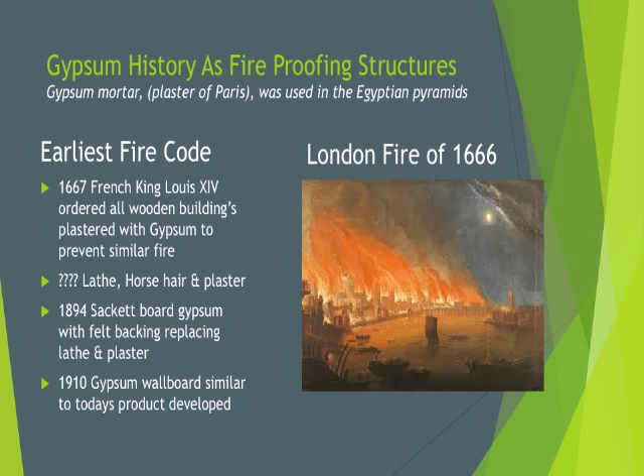Sometime later, gypsum then was used to finish the inside of structures using lath, horsehair, and plaster, and I haven't been able to find reliable dates on when that came about. But in the late 1800s, Sackett board was developed, and that was used similar to the drywall, as we call it, or sheetrock gypsum wallboard that we're using today, except that it had felt backing. About 1910 in the United States, gypsum wallboard, pretty much as we know it today, was developed and has gained in popularity ever since that time.

I'd like to talk about one of the key aspects of gypsum, and that is that gypsum powder is the only natural substance that can be restored to its original rock-like state by simply adding water alone, nothing else, and then formed back into shape and harden. And this can be repeated endlessly. It doesn't lose any of its characteristics no matter how many times we've changed its status.

And then just incidentally, we probably all used gypsum at some time today. At least if you used toothpaste today, you probably did. And I imagine it's 5 o'clock somewhere, so somebody may have had some beer, and good chance that they used some gypsum in it, along with vitamins and tofu. So it has many applications. Gypsum that's reclaimed from wallboard, we have not attempted to have FDA certified for use in food and don't plan to.

So how long have people been trying to recycle gypsum wallboard? Well, it's been about exactly 30 years. The granddaddy in this business is New West Gypsum. Started in Canada in 1985. I think they're still the leader, at least by volume, anywhere in the world. They have, I believe, 7 plants now, with several in Canada and a handful in Europe, as well as one in the United States in Washington State.

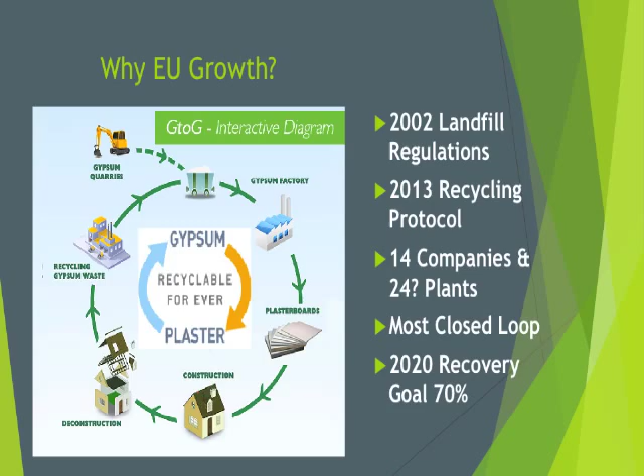So why is it important to recycle gypsum? I know that many of you that are tuned into this webinar are familiar with issues of managing landfills, but for those of you who are or possibly aren't, just a reminder or a recap. We've probably all heard about landfills that had serious H2S or hydrogen sulfide odors, some of them to the point where they were actually closed as a result. Hydrogen sulfide in the recovered gases or methane is a contaminant that at certain levels has to be removed before it can be used in place of natural gas.

The sulfate that dissolves out of the wallboard after it's been in landfill for some time also contaminates the leachate, and in some cases has to be treated differently. And then finally, if it's incinerated, of course, wallboard was created to be difficult to burn, but if it's burned in an incinerator, it tends to release sulfur dioxide gas.

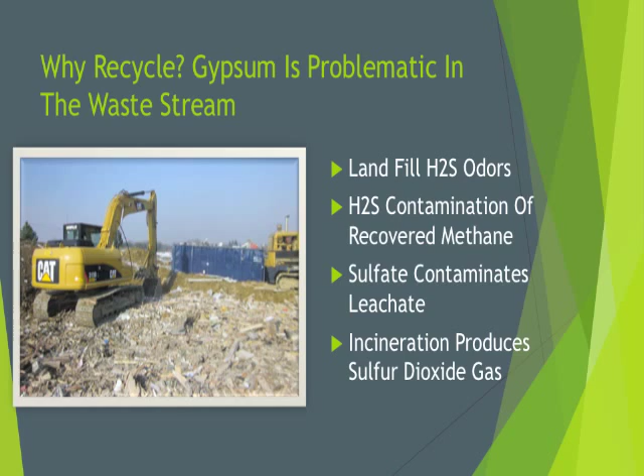So why do all these things happen? Basically because gypsum, when it's placed in an anaerobic state, in the presence of organic matter and moisture, will start to change the form of sulfur from a sulfate to a sulfide as a gas. And there are probably those of you who are listening that know much more about this than I do. But this problem is not new or uncommon. You can find plenty of research on it for well over 20 years.

So what part does gypsum play in having clean air and clean water? Well, the Clean Air Act requires SO2 reductions, and so as a result of that, many of the coal-fired power plants installed scrubbers in their stacks to remove the sulfur that was being generated from burning coal for power. And they did that by injecting liquid lime. The combination is a synthetic gypsum, which is chemically identical to mined gypsum.

This new source of gypsum completely flooded the markets from 2005 to 2012, to the point where in some areas gypsum was considered almost more of a waste than it was a product, and the prices actually dropped to 0. So that was tough for somebody trying to make it in the recycling gypsum business.

Then in addition, in the mid-2000s, the EPA started to take a look at all of these coal combustion residuals and the regulations regarding them, and they included things such as slag and fly ash and gypsum, or some people call it FGD if it's generated from a power plant. I think it was included almost just because it was part of the CCRs.

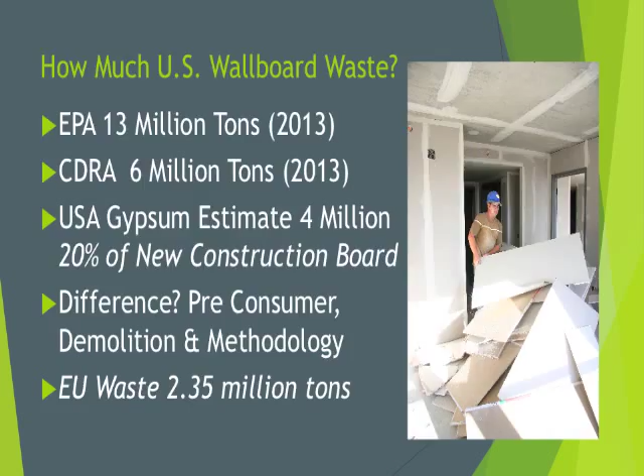So why is 20% wasted? For those of you who are familiar with construction, you may really know this, but it essentially comes down to the fact that gypsum wallboard is a fairly cheap commodity, and putting it in place involves a lot of labor, and the most expensive parts of installing gypsum wallboard is the finishing of the joints, the painting, and that sort of thing. So anytime there's a joint that has to be finished, there's a lot of costs in that, and anytime there's a joint problem, it involves a callback.

So if there is a window, a doorway, or any other kind of cut like that, typically they put the board and then cut out that window or door, and the piece that they've cut out is not saved for reuse. It's tossed. I think the 20% number is conservative. On jobs where we've done sort of separation and monitored, we've found rates that range from 15 all the way up to 40%. So I feel comfortable that my 20% number is probably on the conservative side.

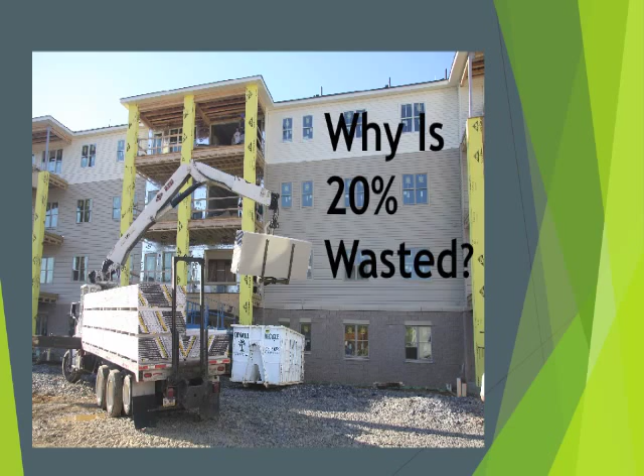So then we drill down farther and we say how much wallboard is actually recycled in the United States. The CDRA white paper, again, reported 300,000 tons, which would be 7% of shipments. And the recyclers that I'm familiar with, who are established and I'm going to say formal, are probably 10 across the country. And so it's being done at a very, very low level.

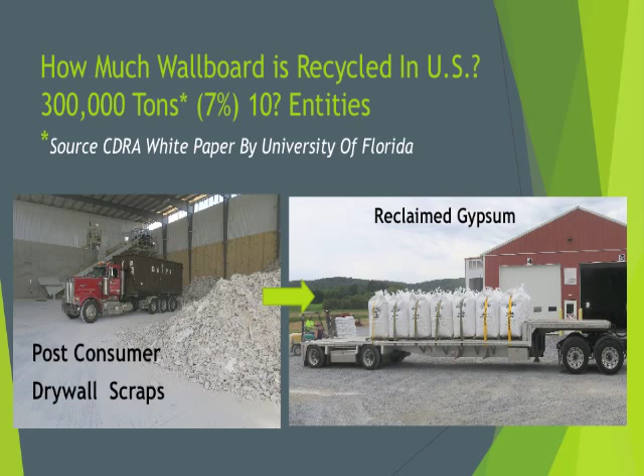So why only 7% for a product that everybody knows how to recycle and it's been done for 30 years? I think the number one thing is that the mentality in the construction industry has been just to throw everything in one container and send it somewhere, whether that could be to a single stream or to a landfill. It is generally not considered much by the crews that are at work handling these wastes on construction sites. We do know that if the wallboard is commingled with the other wastes and exposed to weather, we're going to have a reduced recovery rate, even if it does go to a single stream facility, and the quality of that recovered material will have deteriorated. So there's some single stream loss.

And then we go to urban volume versus logistics. And for those of you who are familiar with what I call curbside or recycling in Pennsylvania under Act 101, they're all the same issues: urban volume versus logistics. And then you have easy logistics in rural areas, but you don't have much volume and you have to travel long distances, and costs and all those kinds of things have an impact on that.

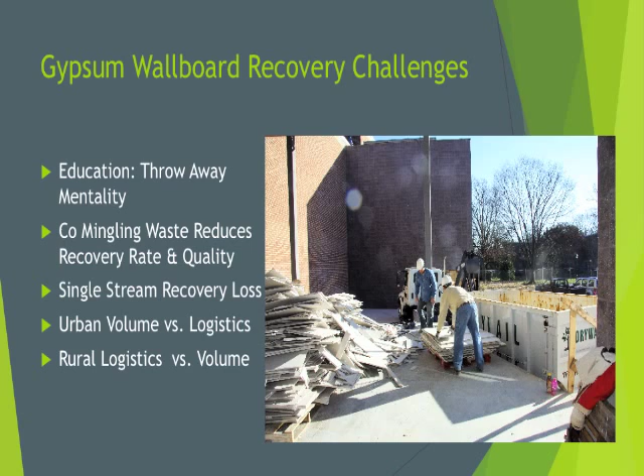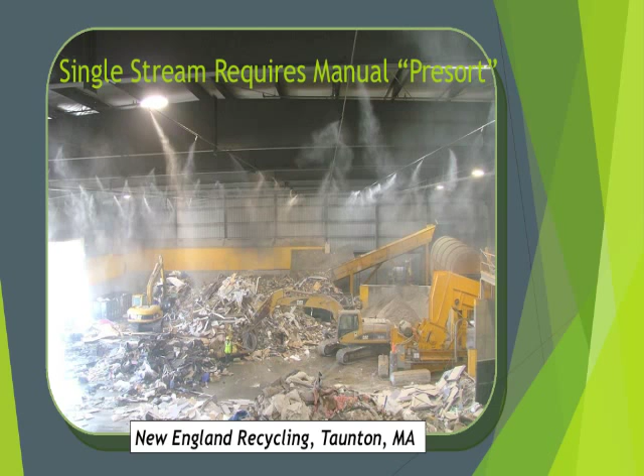So let's talk a little bit more about single stream recycling. I wish I had a better picture than the one I'm showing you, but hopefully you can see that a single stream facility involves lots of trash and lots of equipment. And that material is moved through specially designed equipment to handle C&D. These people that have invested millions of dollars in these facilities are doing a great job of recovering a significant amount of construction waste that otherwise would have found its way to the landfill. But wallboard provides them with a real challenge.

And we have to handle this manually as opposed to through the system. I'll try to shed some more light on that, but typically when those trucks arrive and the mixed construction wastes are dumped out on the floor, they'll use wheel loaders to push it on a pile. A grapple attached to some kind of machine is used to pick it up, put it onto a conveyor. In some recycling systems, there's even a pre-grind to reduce the size to where it's easier to pick.

And then almost every system crosses a screen next to let the dirt and fines fall through. If the wallboard is left in the mix, a great deal of the wallboard by this time is destroyed down to powder size and ends up being in those fines. In most systems, the fines that are screened out go to landfills as alternative daily cover, or ADC as we call it. And a typical well-run single stream construction waste handling system will produce from 20 to 30% of the volume that enters that system going out as fines.

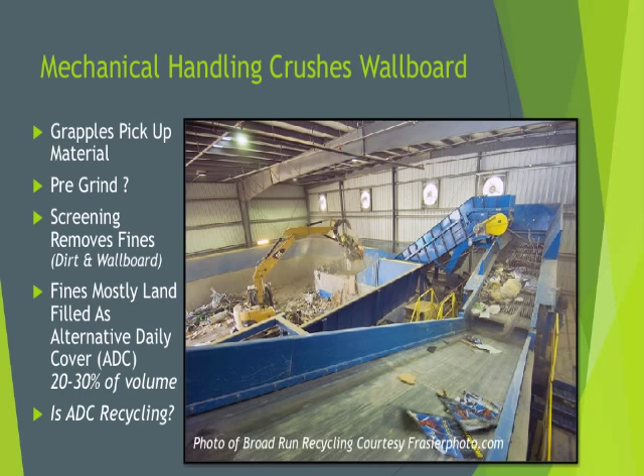The topic of a great deal of debate in the last couple of years has been whether or not shipping fines out as ADC is recycling or disposal, and we'll touch on that again in a future slide. So by the time that wallboard goes through all that mechanical handling and gets up to the typical sort line where the folks you see here are pulling off a variety of recyclables from that belt, there's typically almost no identifiable or recoverable pieces of drywall that can be picked off and sent out for recycling.

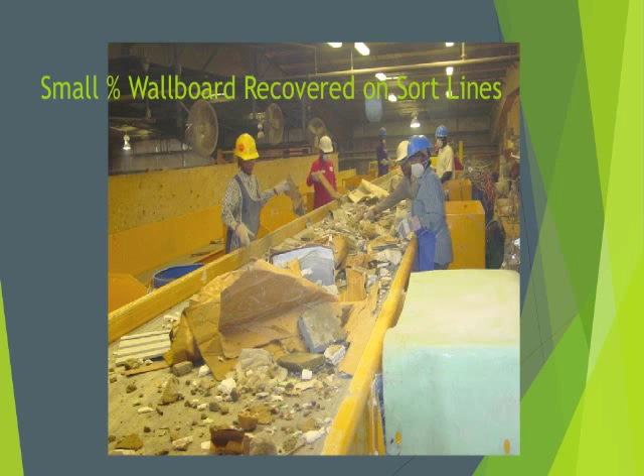So now we have a new version of LEED from the United States Green Building Council. LEED version 4, for those of you who are in tune with that, is coming into play. We still have some of the older versions where projects were filed under the old version working their way through the system, but all new applications have to go under version 4. And it encourages a great deal more transparency than the earlier versions, and maybe inadvertently also encourages source separation. Under version 4, you need to identify whether it's source separated or whether it's going as commingled to a recycling center, and also need to identify the end markets for those products.

So it presents a further challenge to something that's near and dear to my heart, which is something in the industry we've termed sham recycling. We have situations where people would bring everything in, run it through a grinder, cherry pick a few of the valuable items, send 50 or more % out by rail as alternative daily cover, and claim that they had recycling rates sometimes as high as 95%, with no auditing and no identification of markets. It just happened on a fairly wide scale.

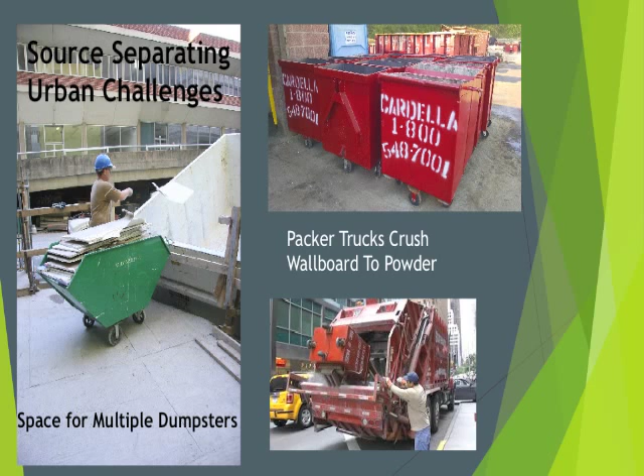C&D waste can be commingled and inserted into what are often called minis, the little red containers in the upper right, and then rolled down to a street or parking area, and a crusher packer truck picks it up. There's gypsum in that mixed waste. By the time the packer truck's done, it's really turned to powder that can't be in any way separated from the other waste.

Then we deal with things like staging space. If we're going to have a separate dumpster, and we can only have one there at a time, we've got to be able to stage a whole dumpster load of drywall or wallboard before we bring the wallboard dumpster. So it's got to be stacked somewhere. The gentleman on the left is dealing with one of those piles, and a cart on an elevator goes, taking it down a freight elevator and somehow getting it in that container.

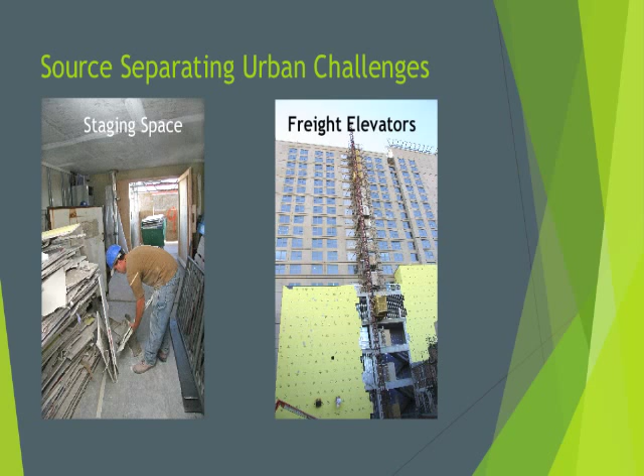So now to talk about a potential solution. New York City generates 300,000 tons per year, and that number comes from the building product ecosystems. For years, we've been working on attempting to get wallboard out of New York City. We've had some success. We have a few good partners there that have worked with us for a long time. There have been some policy efforts going back to 2003 that involved everything from zoning to some city efforts. There has also been some auditing of the recycling rates.

And after all this trial and error, I suppose you could say, we actually tried the One World Trade Center, and we got some loads out, but it was just very difficult, and everybody kind of lost interest in it. And I'd like to give a shout out to the Durst Organization, because they decided that they wanted to make this happen going forward. They have a group that's building product ecosystems, which looks at a lot of different facets of building, but within that, they formed the Wallboard Systems Work Group, which is a partnership between academia and industry and other stakeholders.

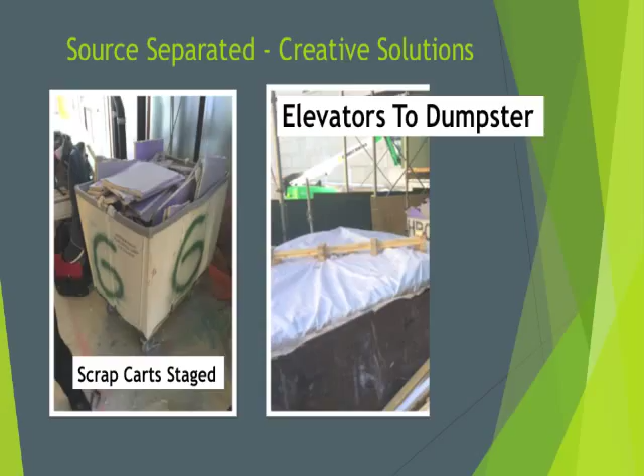And this gives an idea of maybe a typical job site situation, everything going in and out of one dock and elevator for a huge facility. This one is Lendlease construction, and the dumpster in the background actually is being loaded with drywall in this picture. It will need to be pulled as soon as it's done and then replaced with a dumpster for other types of waste. So that type of management and juggling around between concrete trucks and other trucks delivering materials does require some extra effort.

After the containers are loaded, they're being taken to a company called Cardella Waste, who's been in business in New York City for, I believe, 65 years in recycling. They've partnered with us for, I believe, the last 10 or more. And they have a single stream recycling processing facility. But in this case, those dumpsters filled with wallboard are really source separated and clean. So they set aside an area where they can stage those dumpsters until they have enough for a tractor trailer load. We pick it up in a tractor trailer and bring it to our facility for processing.

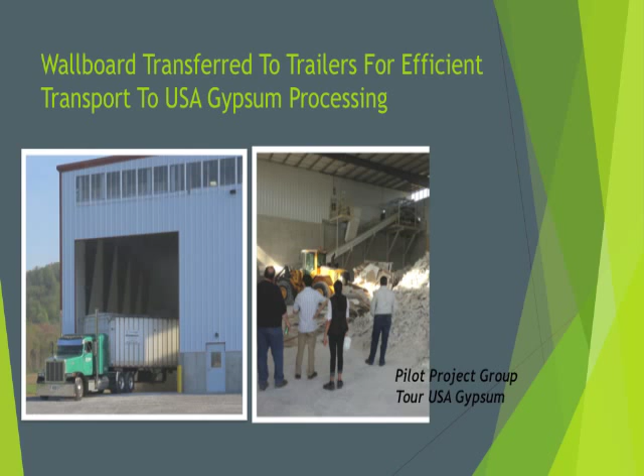And if you can see, that's our facility on the left, and then on the right, we had a nice tour where the whole group made a loop around to follow the material as it made its way through the system.

The reclaimed gypsum that came from our plant went to the United States Gypsum Company, a plant that was in a prior slide. And the reclaimed gypsum that we provided was blended with our other sources. And so far that has worked well in process. There have been no quality issues with the board or otherwise. And so actually this closed the loop. So the wallboard made a complete loop.

One component of this group was research. Over 50 samples have been taken and tested so far, and they include various pieces of new board from different types, different manufacturers. The group also benchmarked this against demolition board that they pulled. Heavy metals levels did not exceed established limits so far.

And what we're hoping to come up with is a protocol, and I would hold out as an example the UK's protocol PAS 109, which addresses the chemical and physical specifications for reclaimed wallboard, and also best management practices for collection and processing. So I'm not going to talk more about the results of the laboratory work that's been done.